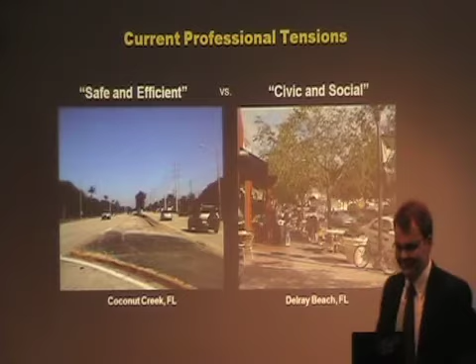So in outlining what we're going to cover today, I want to talk about how we got where we are. If you dig through the historic literature, it's really rather interesting because it was not at all clear that the disconnected suburban subdivision arterial network was the kind of network we would have. It was adopted for the best of reasons, and we sometimes forget why we developed it. We accept it as a given, but going back to the original reason why we designed this is useful for understanding how to move forward. And then I want to talk about the two issues that are often a problem when you start talking about alternative street designs, and that's mobility and safety. And I want to conclude by talking about the trends, both nationally and in Texas, that are encouraging us to take a more form-based approach to design, moving beyond traditional functional classification.

Now, to understand why we have what we have, we've got to go back to the grid at the beginning of the 20th century. Urbanists love the grid, right? We romanticize this as the street network that we seek to embody for its ability to address pedestrians and the like. But at the turn of the century, 1910s, 1920s, it was a problem because the grid was never designed to address automobile traffic. It was designed to maximize the number of corner lots we have in our streets.

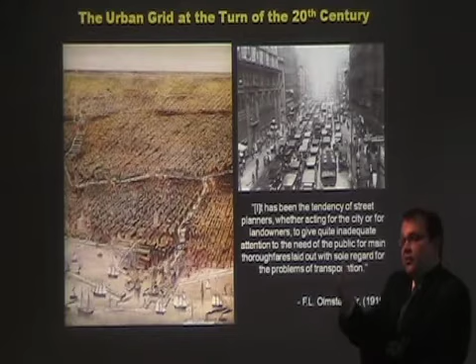Corner lots were the ones that commanded the most developmental profit because they got the most traffic. So if you wanted to maximize the number of corner lots you had, you simply carried out the grid. It also allowed us to move from planning to platting. Cities like Chicago, like New York, if they wanted to grow, just expanded the grid ad infinitum.

Now, when you're dealing with purely non-motorized forms of travel, this isn't a problem. But it became problematic when we introduced the automobile, because just as these streets were good for carrying pedestrian traffic, they proved pretty nice for automobile traffic too. So when streets got clogged like this one in Chicago, traffic would filter onto the adjacent streets in the street network. So what you wind up getting is automobile traffic entering and diffusing throughout the street network, creating problems for residents there.

This is Frederick Law Olmsted Jr. At the turn of the century, 1916 actually, trying to address this problem. And what he said is it's been the tendency of street planners, whether acting for the city or for landowners, to give inadequate attention to the need of the public for main thoroughfares laid out with sole regard to the problems of transportation. What he's complaining about is the grid. The grid is not designed to address modern transportation needs.

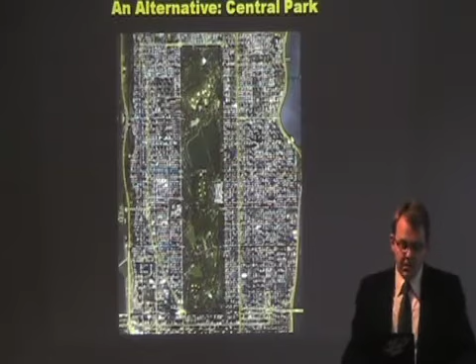Now, it turns out he had an alternative that he thought might work, and that was the alternative proposed by his father in the design of Central Park. Now, those of you who have been there know the way, well, let's take a step back. One of the major design problems that Olmsted Sr. had when designing Central Park was how to deal with cross-traffic from one side of Manhattan to the other.

When you're dealing with a park of this magnitude, there's going to be a lot of cross-park traffic. And the concern he had was how do we design this park so that traffic doesn't undermine the recreational and pastoral purposes of the park itself. A lot of high-speed cross-park traffic would prove problematic for giving folks the recreational pastoral character of the park.

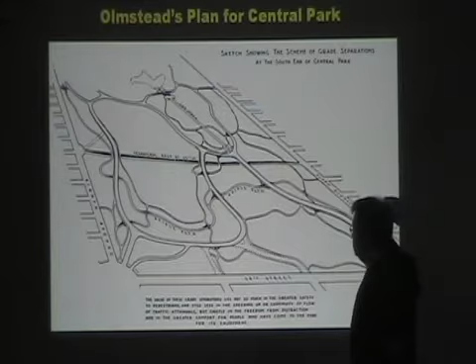So the solution he came up with was transverse roadways. He grade separated the thoroughfares that cross the park. So while the surface of the park has a winding street network, a very rural rustic street network, and pedestrian only, the cross-street traffic was put beneath grade, separated out from the surface of the park so that people using the park wouldn't see it. It also allowed this traffic to move across the park relatively quickly without being impeded by traffic on the surface.

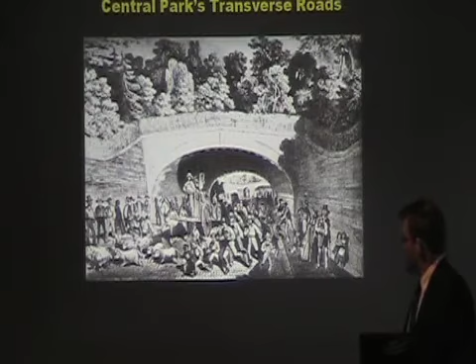This is what it carries today, a different form of riffraff. In this case, it's automobiles. But the idea is clear. We can provide different types of thoroughfares. One type is a recreational type of thoroughfare intended for lower speed pedestrian traffic, and another type is designed to accommodate automobile traffic and the like.

This was carried forward in the first city planning manual, City Planning, 1916: there needs to be a pronounced differentiation between main thoroughfares intended for traffic carriers and secondary or intermediate ones intended for local development.

We need to start designing streets according to their intended function. We all know this today. This is where the idea of functionally designated streets comes from.

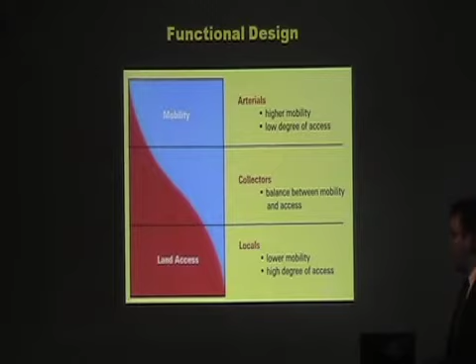The functional classification system that we like to rail on engineers for using was actually designed by planners. It says we're going to design roadways purely on their traffic function, with high-speed arterial thoroughfares carrying high-speed traffic, and local streets carrying access-related traffic with little throughput. This came directly from Central Park, from Olmsted Jr., into early city planning manuals, and was embraced by the engineers subsequently.

It wasn't enough for planners to begin functionally designing streets for their traffic function. We also started rearranging land uses too, and we often go to Perry's neighborhood unit as a model to emulate today.

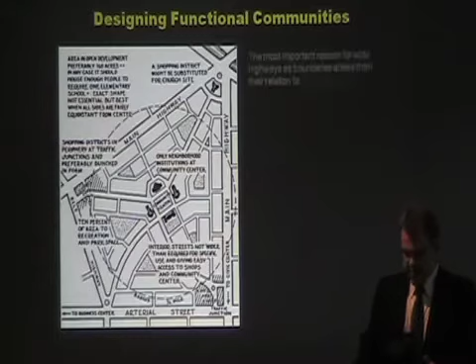But I think we often forget one of the major innovations Perry was promoting here. This was intended to address traffic safety. We still have arterial thoroughfares, but they've been pushed out to the boundaries of the community.

What he wanted to do was, with adequate express channels on the circumference of the unit, through traffic would have no excuse for invading its territory, and its own internal streets could be fairly and deliberately made inconvenient and forbidding to vehicles having no destination within the neighborhood. In other words, by bounding the community with arterial thoroughfares, we can keep this traffic out of the community itself.

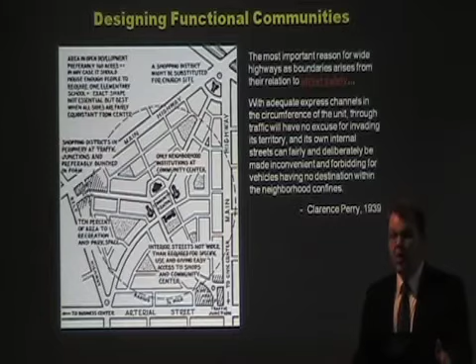But that's not all that was going on. It also entails a rearrangement of the land uses in a community too. Community-serving uses, churches and schools, can be kept at the heart of the community. The problem is the retail. What do we do with that?

If we include retail in the heart of our community, we're going to encourage traffic to enter it. What he proposed was pushing this out onto the junction of the arterials, separating commercial and retail uses from residential uses, pushing them out onto the high-traffic thoroughfares.

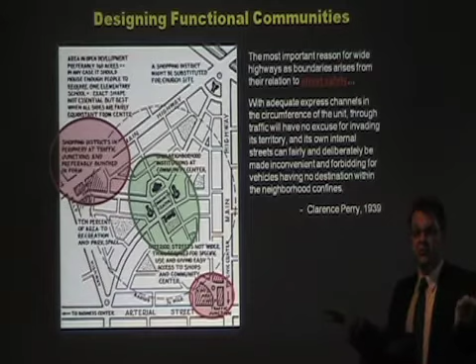And if there's any doubt about the development model that Clarence Perry was putting forward, you can see it here. This is a model he proposed in 1939. It comes from Washington, D.C., but it could be just about any strip development we have today.

Let's push the retail back from the street, provide plenty of parking so that residents coming in and out of the neighborhood can access these on their way to and from work, and so we can capture pass-by trips from the arterial. This is where the modern subdivision, or the modern strip mall, comes from. It's part of the neighborhood unit concept.

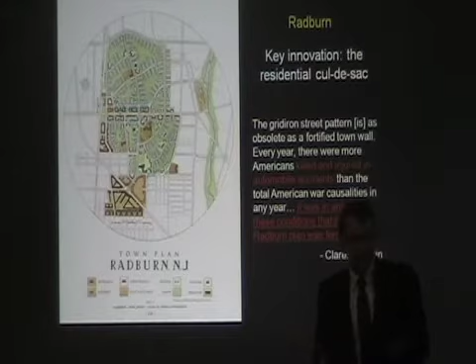It reached its apotheosis in Radburn. Most of us are familiar with this one too. Radburn decided to take this a step further. If Clarence Perry wanted to discourage traffic by providing arterials...

Clarence Stein wanted to solve the problem of traffic on residential streets once and for all by putting in residential cul-de-sacs, so that not only would traffic be discouraged from entering residential streets, but there would be no point for them in doing so. Again, this was a traffic safety solution.

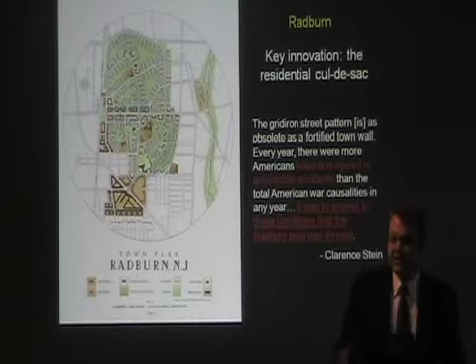The gridiron street pattern is as obsolete as a fortified town wall. Every year there are more Americans killed and injured in automobile accidents than the total American war casualties in any year. It's an answer to these conditions that Radburn was formed. It's a traffic safety solution.

And we've got the same model: residential separated from retail, retail on the major thoroughfares, but now instead of having residential streets that connected, they've been entirely disconnected from the adjacent street network.

So what we've got are three guiding design ideas. One, that we're going to design roadways for specific functions. Two, that we should redesign the residential street network to reduce cut-through traffic. And finally, we should relocate traffic-generating uses to arterial thoroughfares.

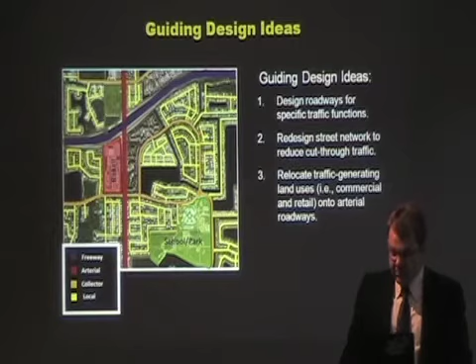But we've done ourselves one better in this too. We wound up transferring responsibility for the arterial thoroughfares away from urban designers, landscape architects, and planners to the engineering profession. And this happened in a sort of happenstance manner.

The problem we had at the turn of the century was the problem of rural traffic. In Texas, you have all these FM roads, farm-to-market roads, and these roads are intended to help farmers carry their goods to market, exactly as the name implies.

But in the 19-teens and 1920s, the problem with these roads is they're dirt roads. And as you see in Texas, these dirt roads, when they get a little water, become impassable. They become worse still when they dry.

Roads were grooved and rutted and impassable. So the concern we had nationally was how are we going to get the farmers out of the mud?

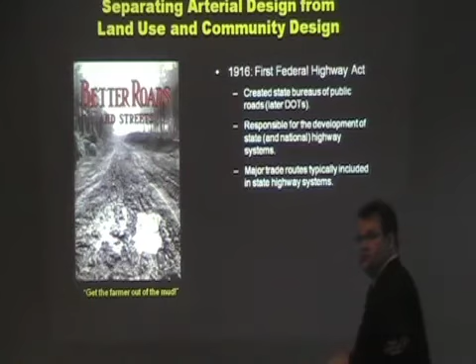In 1916, the same time the city planning guidebook was first published, we also had the first Federal Highway Act, which created bureaus of public roads. They were created for the express purpose of designing farm-to-market roads, paving major regional, state, and national roadways to allow farmers to get their goods to market. They're responsible for the development of state and national highway systems, and their major trade routes throughout a state were included on state highway systems.

It's important to recognize your departments of transportation all started as bureaus of public roads, and many of them still focus on road building as a legacy of this.

That DOTs are focused principally on mobility was ensured when we provided a dedicated revenue stream to support mobility-based efforts. In 1932, we adopted a federal gas tax to support state highway systems. We now have agencies in each state with a mandate to address mobility and a funding source that allows them to continue pursuing that mandate.

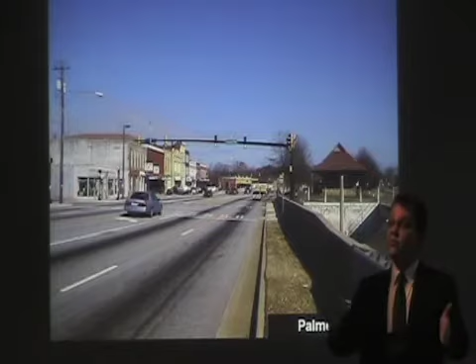Which is why, when you go through our main streets, you see these types of roadways. This is Palmetto, Georgia, could be Fredericksburg, Texas, could be many of our towns. These were the major trade roads that existed at the turn of the century. Development located on these roadways because of the high amount of traffic that occurred there.

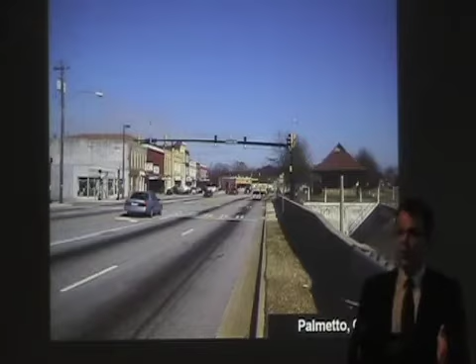But as they were later adopted onto state highway systems, they became designed to state highway system standards. Because the unit of design moved from lower speed pedestrians, draft vehicles, and the like, to automobiles, the design standards of these roadways changed.

A lot of battles you see in Georgia, and I worked in New Jersey where you see a lot of these too, are about how do we take these streets and convert them back to the lower speed uses they used to serve. So that's how we got to where we are today.

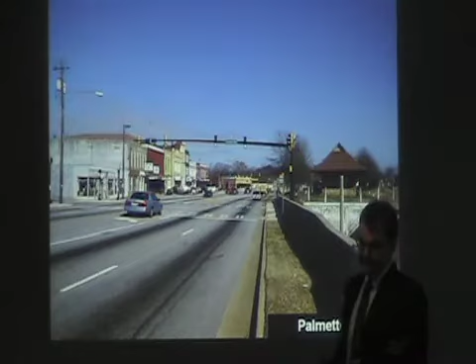The question becomes, how do we get back to where we want? New urbanists want to go back to the original development model, because there's value to be had in the traditional spaces we used to build, and the effort is to go back to designing them.

Well, today, how we approach arterial design and planning is through a model like this. This is Henry County, Georgia, but it could be anywhere in the country, Houston or anywhere else. What we do is develop aggregate models that focus solely on arterial roadways, because these are the roadways we design to carry our traffic.

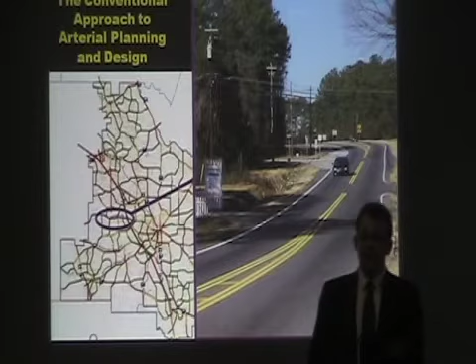We identify in the horizon here where congestion is going to be, in this case a two-lane rural roadway, and then we provide capacity for that horizon. So we add capacity for that horizon. Our planners have come around and zoned it for retail and commercial uses, so the retail and commercial uses follow shortly thereafter, and what we've done is undermined our mobility over time by virtue of the disconnect between the transportation and land use plan.

Now don't blame the engineers for this. We hate these roadways, the strip commercial on the arterials. The engineer never wanted these things to have strip commercial uses. This is a land use problem, and it's a planning problem.

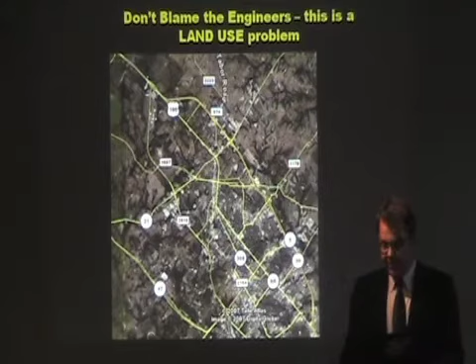This is Bryan, Texas, and here's the zoning ordinance overlaid over that. Planners find these arterial roadways irresistible. They love to take the red crayon and color the lines. I think they're incapable of not doing that. So here, the land use plan for Bryan colors the highways for commercial arterial use, which allows us to create a lot of unnecessary access-related traffic on those roadways.

Perhaps even more irksome, they spent all this money building a bypass route around the city, and then—another thing I don't understand about Texas—these access roads. They don't make any sense. So we build a bypass, then we put access roads on them, and then we put retail on them, and what we have is a really terrible commercial street. Anyway, that's what we have to run with.

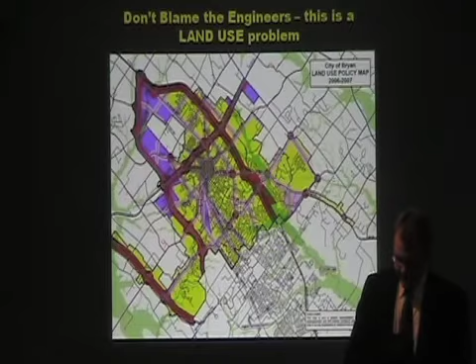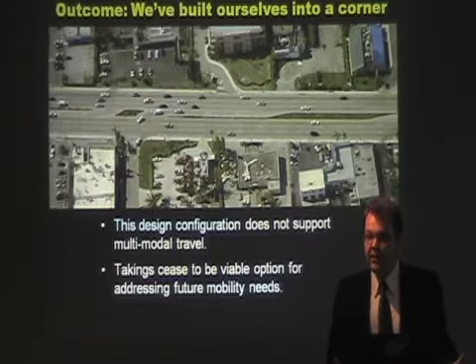It's not a design that accommodates multimodal travel well, but it's expensive to take more right-of-way. At a certain point, it simply becomes too pricey to add capacity. So you wound up building yourselves in a corner.

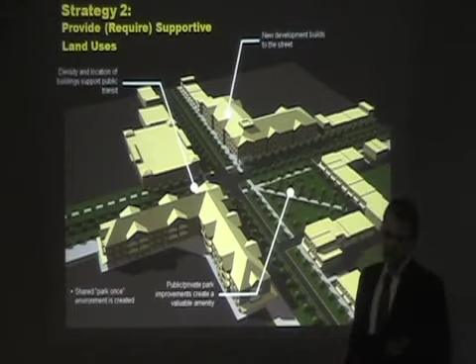Now, a lot of the effort today is focused on how do we make these design conditions more pedestrian-friendly. This is bread and butter new urbanist stuff, right? We add pedestrian-oriented streetscape features, and then we bring the buildings to the street. Now we've got an environment that is a little more conducive to pedestrians, a little easier to access transit on the right-of-way.

But it doesn't solve the vehicular mobility problem. We may have designed a street network that works well for other modes, but we do so by neglecting vehicular mobility as well. A lot of times, and I think it's the wrong way for urbanists to go, we like to fight these pedestrian versus automobile battles. We do it over safety, and we do it over mobility. And if I make one point today, it's that there's a win-win solution.

Hopefully you'll come away from this and realize that we can address the needs of transit, the needs of pedestrians, and the needs of motorists all at the same time if we rethink the nature of the problem.

The nature of your urban traffic problem, your congestion problem, is what's called control delay. It's delay associated with intersections. The more traffic you have at these intersections, particularly these left turn movements, takes time away from through-moving traffic. The more traffic you load on an intersection, the less efficient it becomes. And when you model level of service for urban streets, that's called control delay. That's what drives your level of service in this environment.

We've created a problem where our intersections don't work well by creating a disconnected street network. Our default design, coming straight from the landscape architect and urban design folks, is to design our transportation networks with sparse hierarchy, where we've got an arterial thoroughfare designed to carry all of our traffic. But what we've done is we've designed a network with choke points, right?

We've designed a network where all of our traffic is loading onto a handful of intersections. So we've got to take time away from each of those intersections to allow people to filter into it.

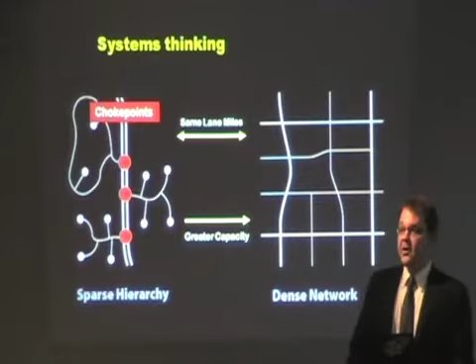Which is why, when you take the same amount of lane miles and you put it in a connected network framework, you wind up getting better performance. Because that traffic's able to diffuse. No individual intersection has to carry the same loads as these. The traffic is dispersed.

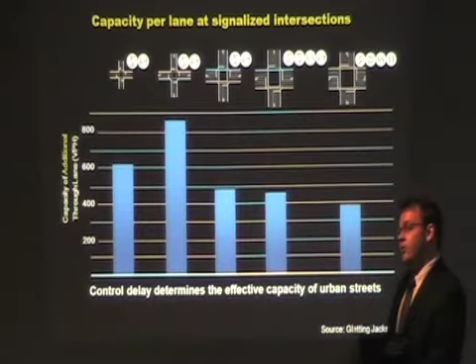And what we see here, and I think in a lot of these slides you're about to see are from Glatting Jackson, who do some great work on this, is that your capacity per lane is optimized in a 3-lane configuration. Right? 2 through lanes, 1 in each direction, and then 1 left turn lane to get that left turn traffic out of the through lanes.

Adding lanes beyond the 3-lane configuration doesn't get you the same bang for your buck. You're better to have a network of 3-lane roads than multi-lane roads throughout that transportation network. Because as you start adding the extra lanes, you wind up carrying the extra traffic and you wind up having to allocate the extra time to those intersections, especially for your left turns.

So if we move away from this arterial thinking and we start thinking in terms of networks, what are the kind of things we can do? In the case of Chattanooga, this runs along the waterfront and connects up to their aquarium.

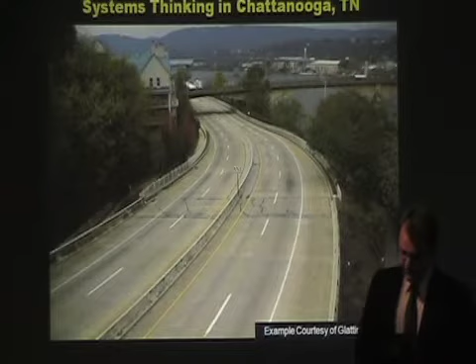What do we see? Well, the problem they have with this roadway is that choke points were backing up along it. Where the roadway enters the grid, the first intersection fails, then the next intersection fails, and it bleeds on down the roadway. So how do you solve a problem like this?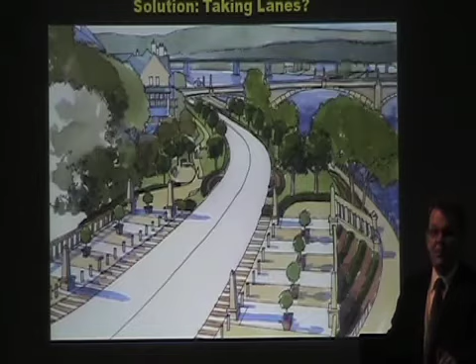Do you add lanes? Well, what they said was, we could solve this problem by taking lanes. And you might say, well, how can that be? We have a capacity problem. Well, the problem is a problem of sparse hierarchy.

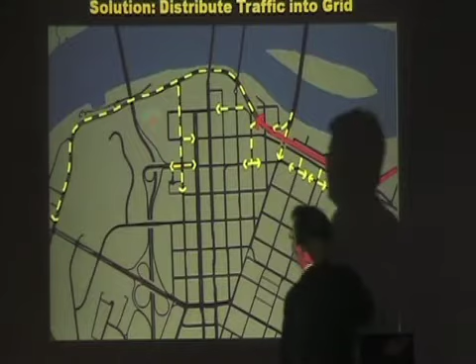Right now you've got 1,758 vehicles per hour peak. At this point, 2,050 vehicles per hour peak up at the top, filtering down to the network. But if you start punching holes in that network, this traffic can diffuse. Rather than forcing it to load all into this section of roadway, it can diffuse down through the network. After completing this, your road traffic volumes are cut down by more than half, which allows you to pull capacity out of that roadway.

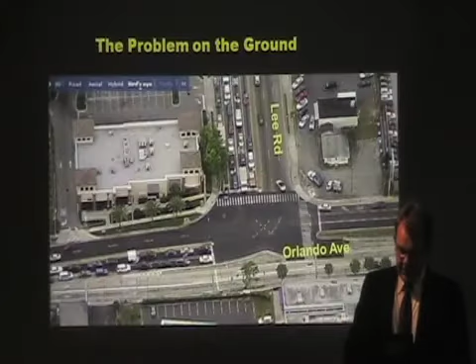Another example, this is Winter Park, Florida. The problem here is you've got two arterial thoroughfares, one of which jogs around a super block. You can see the problem on the ground: you've got all of this traffic trying to load into this intersection, particularly with the left turn movements, and at peak hour it backs up.

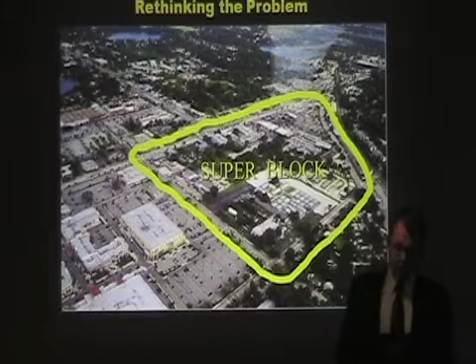The problem, however, is in part a land use problem. How to solve it? Well, first is to recognize that the problem is created by the presence of a super block, where traffic has been forced to channel around it. But if you punch holes in the super block and allow traffic to sift through, you can relieve traffic. So the plan for this intersection was to punch the network through, allowing traffic, rather than jogging through two left turns, to go straight through.

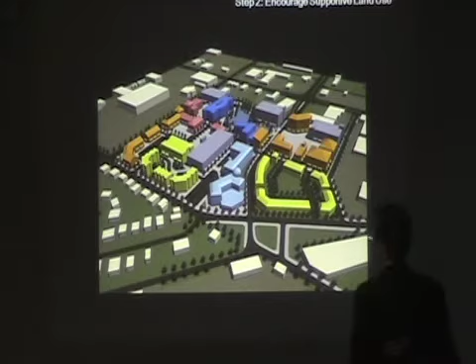And while you're at it, redesign the land use in a more multimodal configuration. Models for it took it from level of service F to level of service E, or D. Not a great improvement, but an improvement nonetheless, and one that can actually be shifted onto the private sector—you simply include this in your land use codes. Well, in places other than Houston, right? Places that do have land use codes. I guess you have deed restrictions instead.

So rethinking the problem, you've now got a neighborhood that is multimodal, walkable, pedestrian friendly, and one that moves traffic better too. It's a win-win solution.

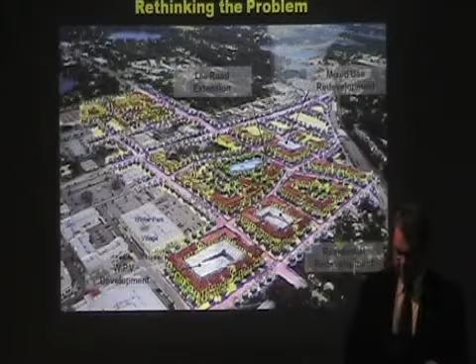The big point I want to make is that a lot of our urban mobility problems are as much urban design and operations problems as they are capacity problems. We've historically been too quick to say we need to add capacity to the intersection, and not really thought from a systems perspective on how we can address this through means other than capacity. We're going to have to start doing this, and you're going to see more and more of it—I'll tell you why at the end of the lecture.

But the point I want to make is we need to start thinking in terms of systems and networks. Because if we start thinking in terms of systems and networks, we can come up with win-win solutions that get us roadways that move traffic and that get us roadways that address multimodalism.

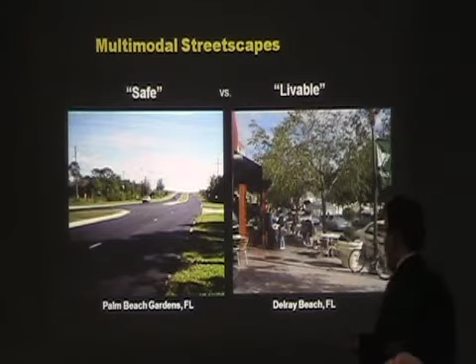The second issue, and this is one where most of my research focuses, is the issue of safety. If you want to get an engineer really worked up, you tell them this is safe—this violates everything we learn in engineering school. We have made a roadway that is hostile to drivers. If drivers err during the course of traveling, we've got trees for them to run into. They crash and they'll get injured and killed. Deadly. Dangerous.

So we tend to prefer roadways that are what we call forgiving, where lanes are wider so that if drivers deviate a little bit from their intended path, they can correct. These roadside hazards are eliminated from the right-of-way so that if they depart from the travel way, there's nothing for them to strike and get injured.

It was originally believed that speed was the problem, and that if we're going to make our children safe, we need to reduce speeds. And it's not just urban design folks that said that—the first edition of the Green Book, which came out in 1940, expressly cautioned us that wider lanes and shoulders may invite higher speeds, and that higher speeds are a safety problem.

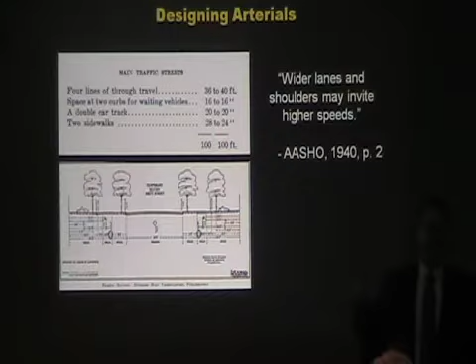This radically changed with the publication of Unsafe at Any Speed in the 1960s. What this book said, we know it because it resulted in the recall of the Corvair, but it was making a broader philosophical argument that engineers embrace.

What it was saying was, we've got an epidemic on our highways. We have focused on addressing driver behavior as the means for addressing safety, so encouraging drivers to go slower. But these drivers are stupid, right? We see this all the time. They talk on their cell phones, they behave foolishly. We need to just begin assuming that drivers are going to make mistakes when they drive. We ought to assume that drivers are going to depart the travel way, run off the roadway, and crash into objects.

In other words, we ought to treat it the same way we address epidemiology. I need to start addressing the environmental sources of hazards and injuries. Stop trying to get the driver to change their behavior and start designing the roadway to avoid the injuries. So let's eliminate the environmental sources of injuries and fatalities.

The publication of this led to a series of AASHTO Senate safety hearings. They were actually called AASHO in '66. They became transportation officials in the '70s, but state highway officials in '66 held a series of safety hearings to figure out how we can deal with this epidemic on the highways.

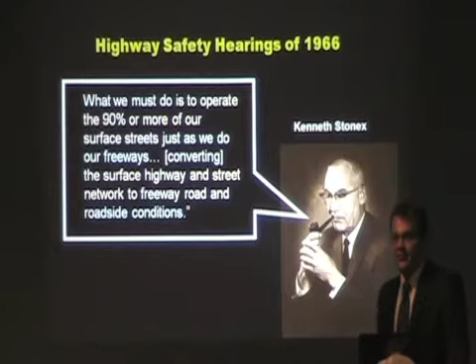He said, hey, we've got to design and operate 90% or more of our surface streets just as we do our freeways, converting the surface, highway, and street network to freeway road and roadside conditions. Now, if you get a Lifetime Achievement Award from the Transportation Research Board for doing safety, it's named after this guy. So those of us who are the best at doing safety improvements will end our careers receiving the Kenneth A. Stonex Award.

He was profoundly influential in the way the transportation engineering profession does safety. We see this in the manuals: highways built with high design standards put the traveler in an environment that's fundamentally safer because it's more likely to compensate for the driving errors he will eventually make. Drivers are going to be fools, so let's make the roadway forgiving.

More modern editions have the same idea: every effort should be made to use as high a design speed as practical to attain a desired degree of safety. High design speeds translate to the use of wider features for lane shoulders and clear zones. The higher the design speed, the wider the geometric features of a roadway.

So what we've got is a design philosophy based on three ideas. One, most of us will agree with this. Even driving around here, I had time to cruise around before the meeting today, and you see people on the phone, cutting in lanes. Drivers are going to err, they're going to make mistakes, and behave in ways that result in crashes and injuries. The second premise is that driver errors are random and unpreventable, that you can't stop drivers from making mistakes. Thus the third premise is that the best strategy for addressing driver errors is to ensure that all roadways are forgiving to them when they inevitably occur.

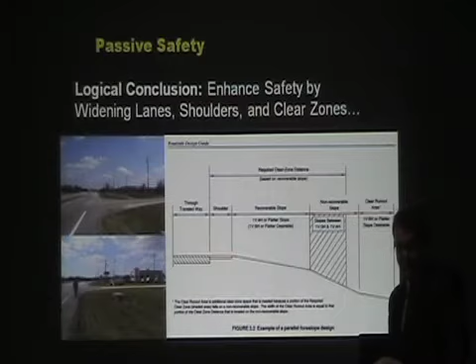So the logical conclusion is the one that I was trained in: we enhance safety by widening lanes, shoulders, and clear zones.

Now the presumption again is that run-off-roadway events, which cause us to design our roadsides for automobiles, are random and unpreventable. And if this is true, you would expect this encroachment event to be constant. This is what we use in things like the roadside program to estimate the likelihood of crashes that occur.

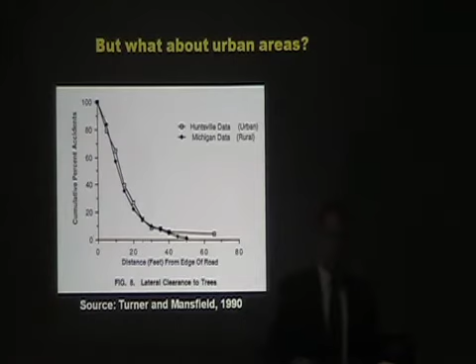But the question then is, what about urban areas? The data used to support the application of clear zones in urban areas compares Huntsville, Alabama—not exactly a pinnacle of urbanism—to a rural environment. In both cases, the majority of crashes, roughly 80-90%, occur within 30 feet of the right-of-way. So the conclusion they derive is that if we eliminated all trees within 30 feet of the right-of-way, we could also eliminate the majority of roadside crashes.

So I decided in my dissertation work to reinvestigate this. Because again, I'm an English major—what do I know, right? It didn't make sense to me. It's in a manual, but I don't see it when you go to these streets. So I figured I'd go out to urban areas, do some field measurements, and figure out what's really going on.

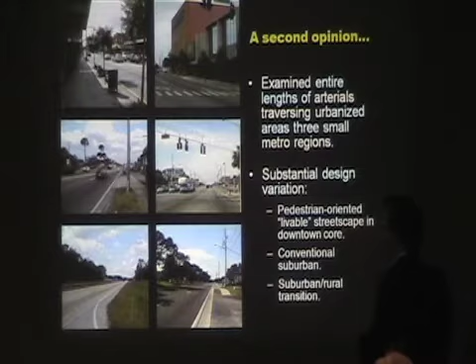I took streets—these are actually in Central Florida, DeLand and Ocala were the communities I looked at. I looked at arterial roadways that traveled the entire length of the metropolitan area. I went out and field measured all the geometric features, and all of them had traditional urban environments along the core. I measured the distance between roadside fixed objects and clear zones, and found about the same thing: more than 80% of these crashes occurred within 20 feet of the right-of-way.

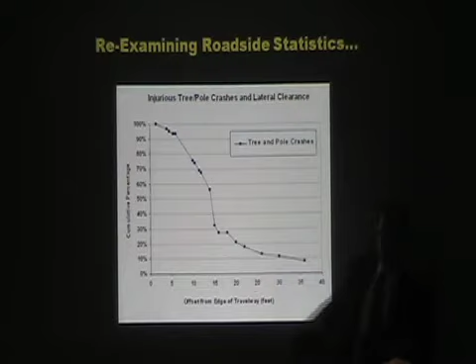Does that mean the original study's conclusion was right, that we should eliminate all these trees adjacent to the right-of-way? Well, no, that struck me as kind of foolish, because most of these streets didn't have 20-foot clear zones. So I also plotted out the percentage of streets with clear zones of different widths.

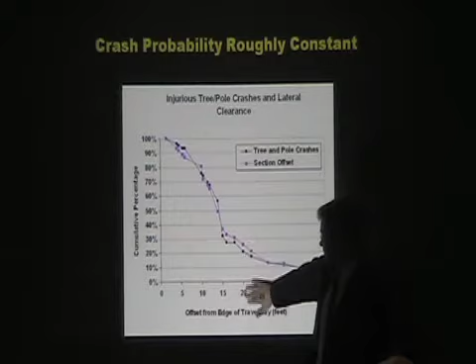And what we see here is that the probability that somebody's going to crash into a tree with a given clear zone width is constant no matter what the width is. You're just as likely to crash into a tree with a 20-foot offset as with a 5-foot offset—the probability is fixed. Stated another way, the low incidence of crashes on streets with wide clear zones is solely a function of the fact that there aren't very many streets with wide clear zones.

All right, now we've got other tricks in our sleeve in engineering school. We like to use statistical modeling.

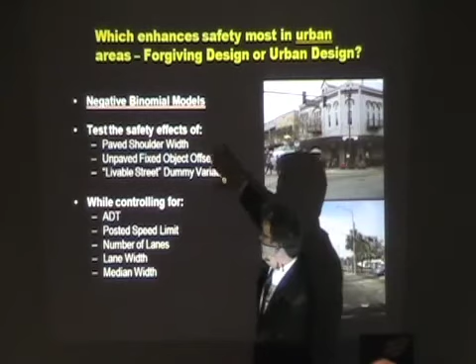I'll try not to make this too boring, but I wanted to see how different roadside safety features affected crash incidents. I controlled for the things you normally want to control for: traffic volume, speed limits, number of lanes, lane widths, median widths, all this stuff that can affect safety. But I also modeled paved shoulder width, unpaved fixed object offset—the setback of the tree from the edge of the paved portion—and then a dummy variable for whether or not a livable street treatment was present, so streetscape features, sidewalks, and the like.

Now if we're going to make a claim that a roadway is safe, that a roadside feature is safe, we've got to make a couple of statements. First, it's got to have fewer roadside crashes. But these roadside crashes shouldn't be replaced by increases in other crash types. So if you eliminate 3 tree crashes but you add 20 multiple vehicle crashes, it's hard to assert that the roadway is safer. We do that, but we shouldn't.

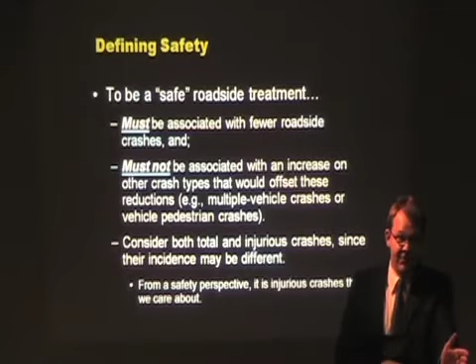I modeled both. I was only able to model—well, we'll get into this in a second. I wasn't able to model fatal because our livable streets didn't have any fatalities, but I stole a punchline for later. That's okay.

So the model results: shoulders, and we engineers like shoulders, these nonetheless were consistently associated with increases in crashes, whether they were roadside crashes or mid-block crashes. Now they didn't reach statistically significant levels, but nonetheless the association was positive. It certainly wasn't this negative and significant effect that you would expect if passive safety theory was true. It was the exact opposite relationship.

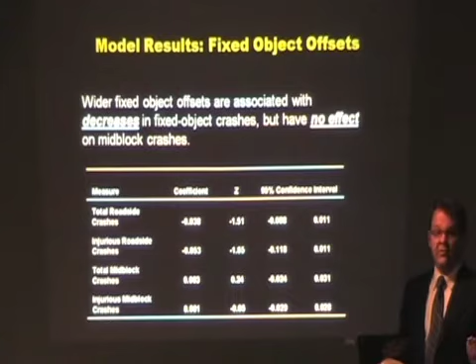Wider fixed object offsets were associated with decreases in fixed object crashes, but actually resulted in no net effect on mid-block crashes. Stated another way, there may have been fewer tree-related crashes or pole-related crashes, but that was offset by an increase in multiple vehicle crashes. Stated another way, there was no net safety gain as a result of providing clear zones.

The only feature that was consistently associated with a significant reduction in both roadside and mid-block crashes were these livable street treatments. Across the board: fewer total crashes, fewer roadside crashes, fewer injurious crashes, fewer mid-block crashes, fewer injurious mid-block crashes. No matter how you measure safety, they're safer. The only roadside treatment consistently shown to do so.

And you might ask, well, how much safer? I'll tell you: per vehicle mile traveled, there were 40% fewer mid-block crashes, 67% fewer roadside crashes. So even though you've got not one but two rows of deadly trees, nobody's crashing into them.

Further, not a single injurious fixed object crash occurred in the livable sections during the 5-year period, nor was there a single fatality involving either a pedestrian or a motorist. And again, if we measure safety in terms of the incidence of crashes, injuries, and deaths, and not in terms of our ability to meet a theoretical design condition, we must then agree that the roadway with fewer crashes is the safer roadway, regardless of the theory you use. Some of us like evidence and not theory. Theory should support evidence, and not the other way around.

All right, so what's going on here? The passive safety theory ain't working. Pushing this stuff back isn't making it safer. Well, it's kind of fun.

You go out and do field measurements, and you feel like you're CSI. You've got the crash reports and you're trying to reconstruct what happened. I got to do this for a couple weeks out in the field, and it's like here, actually—South Central Florida is a lot like this place in February, March. It's pleasant, well, except for this last February where it was freezing, like Seattle here. But generally the weather's pretty pleasant, so it was a nice time.

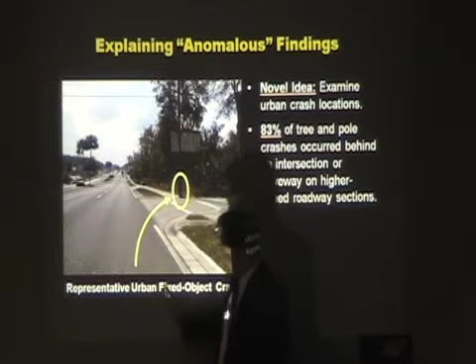If you decelerate, the people behind you come up on you. How dare you? So you wind up attempting to negotiate these turns at speeds that don't allow you to safely negotiate them. So what do you wind up doing? You wind up encroaching on the back end of a driveway or curb. So you wind up hitting this object, right?

And it doesn't matter whether it's located here or 30 feet back. What matters is your trajectory on that turn. The probability of striking it anywhere in this zone is exactly the same.

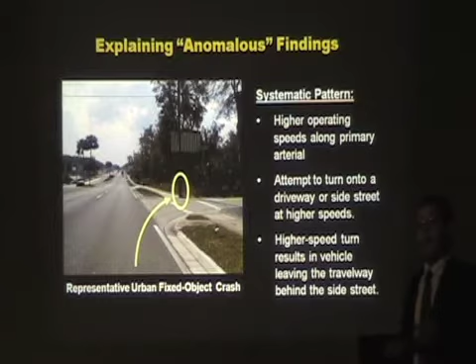The design condition is different, right? The systematic pattern here. This isn't random at all. This is systematic. It's embedded in the design of the roadway. Higher operating speeds on the arterial, an attempt to turn onto a driveway or side street, which results in encroachment at the back end of the driveway or curb.

Which means we need to distinguish between two types of errors. Nobody can disagree that drivers behave like fools. They do. We can see it, and I'm sure we'll see it tonight. Some of us may even be those fools, right? Humans will err, and roadways should be forgiving when they do. That's the theory we have. It encourages us to strive for a single fail-safe solution.

However, there's another perspective, and that's the systematic error perspective, one that we don't design for. And that says that the errors that lead to crashes are the result of the design itself. That we can design environments that make crashes more likely to occur, that encourage people to create errors.

Stated another way, a lot of our designs are like putting a bullet in the chamber of a gun and then handing it to someone. All the conditions are set. All that's needed is for somebody to pull the trigger. Everything is set up. When you have the high-speed arterial with the driveways and side streets, you've loaded the gun and put the bullet in the chamber.

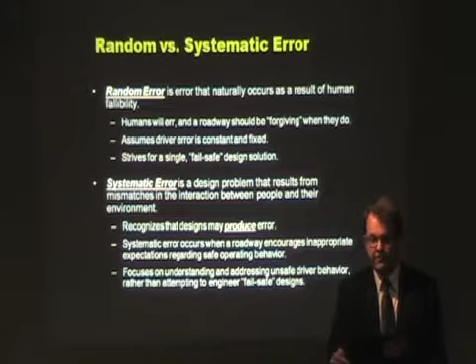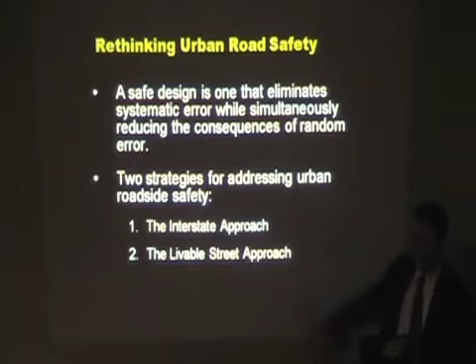All right, which suggests we need to rethink urban roadside safety, or urban road safety. A safe design is one that eliminates systematic error while also reducing the consequences of random error. Now, this is a tough bar to meet, but I would assert to you that it can be done. And there are a couple ways to do this. One is the way we do on our interstates, and I'll explain what that is. And then the second, the one that we as engineers need to start adding to our design palette, is the livable street approach. And no matter how you slice it, interstates, for the most part, are safe roadways.

And they're safe, both for the reason we assume, they're forgiving by design. They've got wide lanes and wide shoulders that are forgiving to errors when they occur. But what we've overlooked is that they also address the problems of systematic error too. A lot of the problems we have on urban streets is that you've got people jockeying in and out of driveways. That's eliminated on these roadways by limited access. Those turning maneuvers that cause people to run off the roadway are addressed here through the use of on-ramps and deceleration lanes.

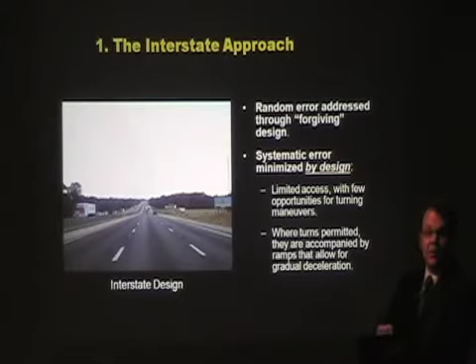Right? We're able to gradually decelerate down a curve. We may also have a yellow sign that tells us what speed we got to do that at. It becomes more transparent what the behavior is. Access management - you don't see a lot of this in Texas, but you have a lot of it in Florida, where you try to control the access on a roadway with medians, deceleration lanes, and the like. These things are safe. They're great.

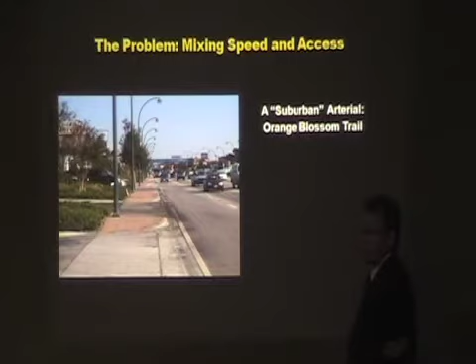They're a suburban road treatment, but they're good from a safety perspective. They separate out access from the roadway. They provide deceleration lanes that allow people to decelerate rather than traveling through the through lane. And so they have the same design conditions: higher speeds, few driveways and side streets, and deceleration lanes. Our problem is this type of roadway, the suburban arterial, where we don't limit access. And this is actually our default design condition. These are actually okay, because traffic's so bad, you go kind of slow out there. That's going about 20, 25, which isn't bad for an urban street.

But if you look at the crash record on streets like this, they're through the roof. Compared to the livable streets we saw, this street has 4 times the roadside crashes, despite the fact that objects are pushed back 5, 6 feet, right?

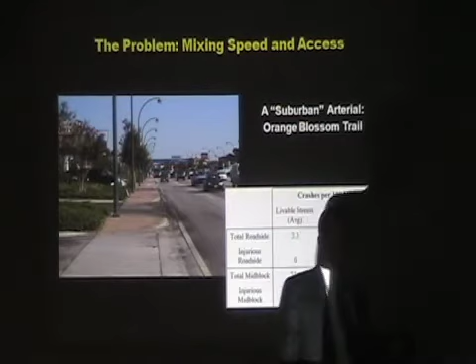They've also got 4 times the mid-block, injurious mid-block crashes, multiple vehicle crashes as well. And when you look at the distribution of crash types, 65% of them are attributed to the intermingling of access and speed. We've tried to have a high-speed roadway and an access roadway at the same time. As soon as you do that, you've created a condition that's a recipe for disaster. Because high-speed traffic traveling through an arterial thoroughfare has a more difficult time braking for vehicles turning in and out of driveways or pedestrians crossing the street. They become less able to do that. You create an unsafe condition as a result.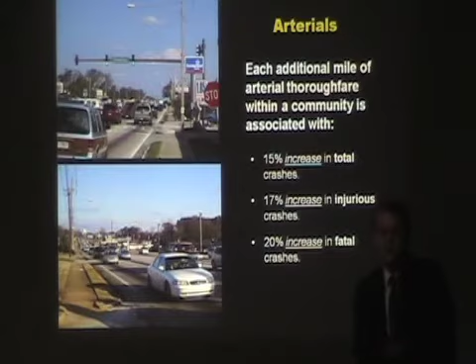Now, as part of the study that won the award from APA, I actually went out with San Antonio and figured out how much more dangerous these things are. Each additional mile of arterial thoroughfare in your community results in a 15% increase in total crashes, 17% increase in injuries, and a 20% increase in fatal crashes. Want to make your roadway more dangerous? Add more arterials. Problem solved.

Strip commercial uses - and this is after controlling for traffic volumes - each additional strip commercial use is associated with a 1.3% increase in total crashes and a 1.1% increase in injuries. And they're agglomerative. You want to drive up your accident tally.

And frankly, on one hand, I kind of like it because it provides work for me, right? Yeah, I guess that joke wasn't fun. All right, I like data, right? So I get to see, I don't have to see it, I get to look at the data.

Anyway, you add these, and this is the percent increase that occurs with each additional strip commercial use added to a roadway. Big box stores, same thing, same effect, but because they're bigger, the effect is even bigger. 6.6% increase in total crashes and a 4% increase in injury crashes.

However, the other issue with big box stores is that there's a lot of off-network traffic too, because you've got to provide circulation lanes for all that traffic that's pulling in and parking. We don't look at that in safety analyses, we just look at the public right-of-way. I wanted to figure out how much of these crashes were occurring off-network in things like driveways and circulation lanes for San Antonio.

In the case of San Antonio, 13% of all the crashes that were occurring occurred off-network. More than 1 out of 10. We don't even count them, we don't analyze them. 9% of the injuries, 16% of the fatalities. Pretty amazing, huh? And a lot of them are people running over their kids in driveways. So that's one source of them. But that's where the fatalities are occurring off-network.

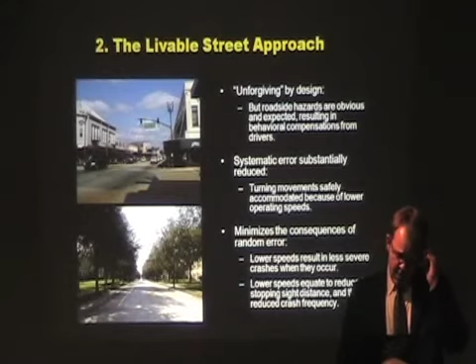An alternative approach is the one we need to add to our palette, which is the livable street approach. Now, these roadways are unforgiving by design. You leave the travelway on one of these roadways, and you'll strike something that will hurt you. However, the hazard is obvious. Most people don't get in their cars and want to die.

On any given year, there's about 50 traffic-related fatalities where people go out, walk into a street, or jump off a bridge and kill themselves. Right? 50. There's roughly 40,000 people that die each year, which suggests to you that 39,950 people got killed that didn't want to die.

And people are pretty amazing. They say, if I run into one of these trees, I'm going to get hurt, so I'm going to try not to run into the tree. On the case of this roadway, it's a 45-mile-per-hour approach. I measured the speed through this section. The speed dropped down to about an average of 28 miles an hour. Perfect. People saw this roadway, and it's a 14-foot lane. You can tear it up through there if you want to. But the environment tells you not to. So you don't. People go at lower speeds.

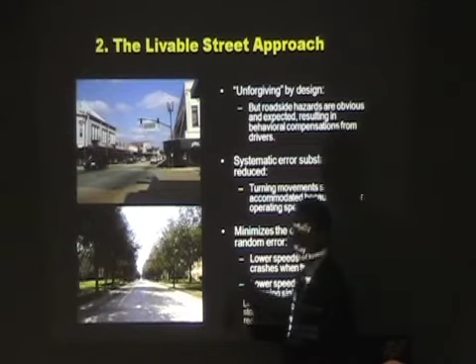Now, these are unforgiving by design, but the hazards here are obvious and expected. And people engage in behavioral compensations to minimize their exposure to hazard and injury. So it reduces systematic error, because turning movements that can cause tree-related crashes are accommodated by the lower speed. It also reduces the likelihood of crashing into another vehicle or a pedestrian, because at lower speeds you can brake more quickly, you're better able to respond. Moreover, as we're seeing in the environmental psychology literature, people are more attentive in environments that have rich roadside environments.

The environment tells drivers to look out for pedestrians and other cars, and people respond by doing that. So it addresses the systematic error, but what about the random error? What about drivers that make mistakes?

Well, we need to go back to the basic physics we learned. What causes injury and death is the amount of force absorbed in an impact, and that force is a function of the speed of the vehicle at impact. So if you reduce speed, you reduce the force absorbed in the impact, making a roadway that's inherently more forgiving, because the force absorbed in that impact event is less. It's forgiving by design because of the lower speed.

So the argument I'd make is that through good urban design, by paying attention to urban areas and their characteristics, we can get mobility and safety. We can do a better job than we traditionally have done. But you're not going to do it for that reason. Texas is going to have to do it, nationally we're going to have to do it. But we're not going to do it because it works better, because it's more sustainable, or because it's the right thing. We're going to do it because we're broke.

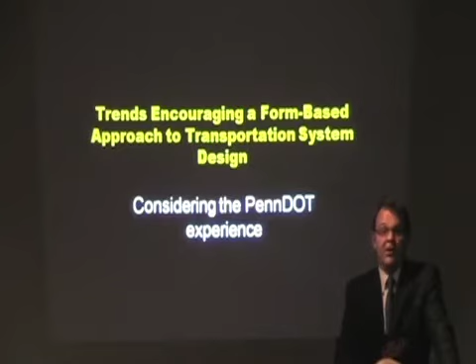You can see this in Pennsylvania. They've got the same problem everybody else does - vehicle hours of delay is going up, vehicle hours traveled is going up, VMT is going up. However, unlike places like Houston, their population really isn't growing. So they're getting all the problems that growing places have, without the population growth.

They've also got the problem you've heard TxDOT complaining about - we don't have enough money. The gas tax is broken, we can't afford to do our projects anymore. In this case, Pennsylvania actually had a gap between the amount needed simply to maintain highways and bridges and the amount available, which caused them to sit back and reassess what they were doing.

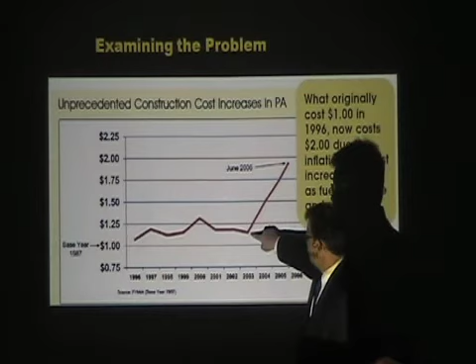What was the cause of the problem? Part of it was that material costs have started going through the roof. It's markedly more expensive to build something now than it was just 5 or 6 years ago. Costs have doubled and tripled for things like concrete, steel, and asphalt.

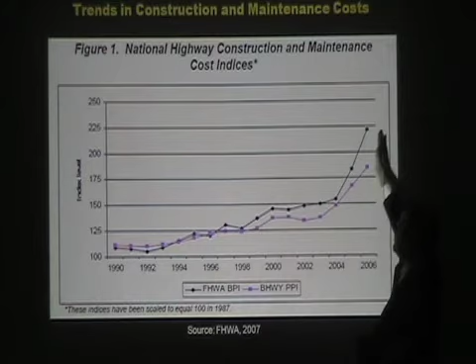And it's not just Pennsylvania - it's not that these things are more expensive there specifically, they're more expensive nationally. We see the same national trends. All of these materials are a lot more expensive to buy today than they were a few years ago, and the reason is there's increased competition for them.

China is in the process of building its own interstate highway system - roughly 85,000 kilometers, 60,000 miles of highway, equivalent to the U.S. interstate system. They're committed to doing this, and they need it as part of their industrialization. That means greater competition for transportation-related materials, and when materials become more scarce, price goes up. This is going to be going on for another 20 years. Regardless of whether we fix the gas tax or not, material costs still cost 2 to 3 times more than they did just a few years ago.

The problem's even bigger - India wants to be a first world country too, and they know that to do that they need to start providing an interstate highway system of their own. Right now India is connected largely by 2-lane rural roadways, and they need to add capacity. The problem is further compounded by Tata Motors creating a $2,500 car, meaning the roughly 300 million people in India's middle class can now afford an automobile. These folks were getting by on bikes, two-wheelers, mopeds and the like. Now there's increased automobile usage, and there's going to need to be infrastructure to accommodate it, meaning more competition for the same materials that are causing costs to go up.

You'd expect costs to keep going up as India begins mobilizing its highway system as well. Now, there are a couple things you can do. I came from Georgia Tech prior to here, and one of the things you can do is the ostrich approach - where you put your head in the sand and pretend you can get around the problem through innovative finance. So Georgia, in its infinite wisdom, decided to do a bunch of grant anticipation revenue bond funding.

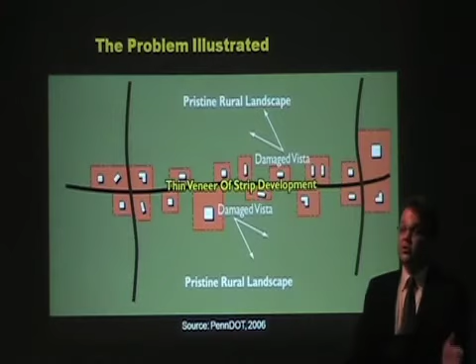Well, they looked at the nature of what's going on. We don't have a lot of growth in Pennsylvania, but we've got a lot of sprawl. Our metro areas are sprawling, and they're doing it in part because our transportation system incentivizes it. We provide highways, and we get a thin veneer of strip development along the corridor.

What they said was, we need to begin discouraging this development from happening. We need to begin having this development occur in compact centers at major transportation nodes, preserving the integrity and mobility use of that corridor itself. In other words, what they're doing is making their transportation problem a land use problem.

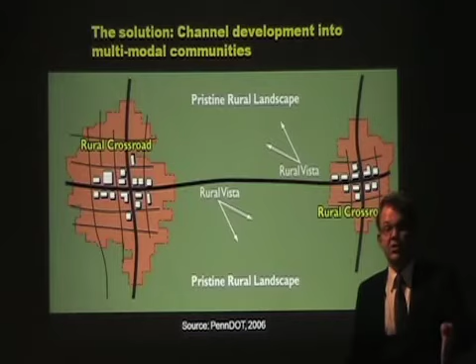We'll skip that for time. The key ideas here: one, we have to focus on safety, and efficient doesn't mean safe. Right now we play this game that we can have a safe and efficient roadway, and in urban areas that's not necessarily true.

And that we can address mobility through land use and urban design. That we ought to be designing environments that maximize mobility, not by enhancing throughput, but by reducing travel demand overall. And then we need to prioritize operations and maintenance.

They've come out with a sound land use implementation plan that they're using in evaluating projects, and they've actually transect coded their metropolitan areas. In this case, this is Philadelphia, which crosses two states. They have transect coded it—the DOT, right? The Department of Transportation—because to get the transportation solutions they need, they have to pay attention to the environment in which they're being placed.

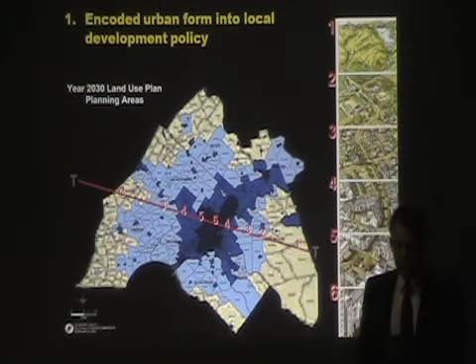And what are they using? Well, they're trying to link roadway design to urban form. And we have a new manual that lets us do that, although most of us have been aware of this thing for the last 5 years, right?

It's been floating around since 2006, recently passed. Used to have a much more unwieldy name. But 'Designing Walkable Urban Thoroughfares' is a context-sensitive approach, which gives us design specifications for mobility-oriented streets that work in an urban environment—your urban avenue and your commercial street.

And you might say, well, fine, Dumbaugh, that ain't the way we do things here in Texas, right? And I saw, about a year or two ago, a design for Kirby and Westheimer, right? And I was impressed with this because it seemed like a Texas solution, right? If you want to make anything better in Texas, put a star in it, right?

Well, I'd suggest to you that business is changing in Texas. Back in 2007, the Texas Transportation Commission authorized the Texas Urban Thoroughfares Committee. Some of you may know about this. It was pushed forward by Mike Krusee, Scott Polikov, who's based out of Dallas but is all over the state—really pushed this thing forward. I served on it. We were tasked with coming up with alternative ways for TxDOT to engage in business practices.

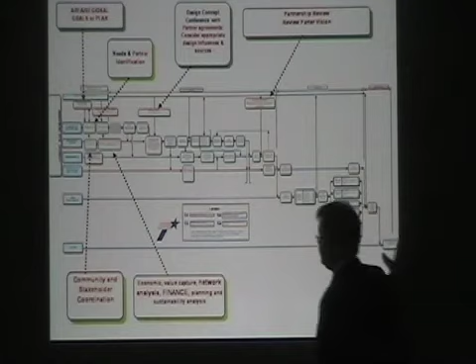And what came out of that were a couple things, and I won't go through all of it. But what came out of it was we need to have more attention to our stakeholders as part of the planning process, and we need to start including local land use plans when we engage in design. So we ought to bring our stakeholders, both community stakeholders and local planning documents, into the very beginning of the planning and design process. In other words, we need to be more context sensitive about the way we do this, and we need to start thinking beyond simple mobility needs.

But this is really exciting too, and I would argue that Texas is one of the leaders in the country because of this. They also actually adopted this manual back last June, right back when it was just an ITE recommended practice.

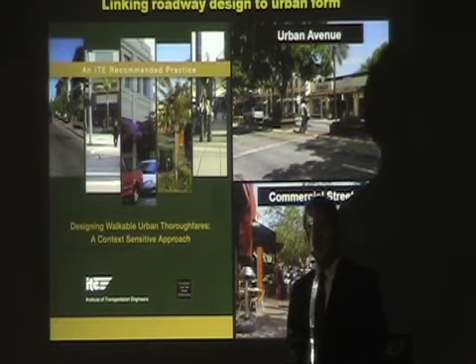Texas adopted this manual as design policy before ITE adopted it as a design policy. You've now got this in the state of Texas as a working document that you can refer to. I'm not sure at this point how it's trickled down the organizational layers in the Texas Department of Transportation, but when you hit a TxDOT project, refer to it. It's been authorized by the Texas Transportation Commission.

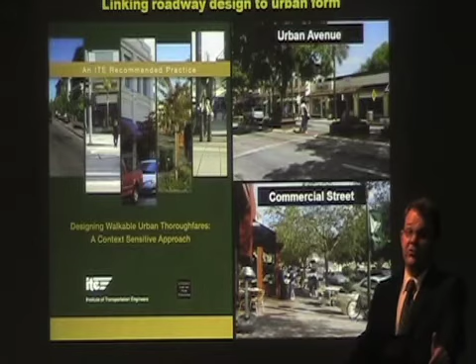It's an adopted design manual in the state of Texas, which gives you design specifications for creating urban avenues and commercial streets, something we didn't have before. There's been a training component that we've proposed as part of this, and I haven't heard where that's going in a while. But ideally, there will be training to train TxDOT staff at the district level on how to actually implement these design guidelines in practice. Texas is way ahead of the rest of the country on this, and it's an exciting time to be here.

So what I would conclude with is that there are two possible futures. The first is that we can continue with our current practices, and what we're going to wind up having is crumbling infrastructure. We're deferring maintenance, we're deferring improvements that we need to do on our system to add capacity. We can't afford to do it anymore. Sooner or later, every state's going to have to come to terms with the fact that we don't have the budget to do the stuff we've been doing for the last 50, 60 years. The money's not there anymore.

The question then becomes, well, what do we do? Do we keep trying to add new capacity at the expense of the stuff that exists, or do we start rethinking our approach? And I would argue to you that this is a better scenario than that.

According to the Brookings Institute, half of the built environment that will exist in 2030 will be new. It didn't exist in 2000. And if you think about that, in our lifetimes, we're going to have the ability to shape half of the development in this country, for good or ill. And it's an amazing challenge to deal with. We can't afford just to take care of what we've got. We've got to come up with a new way to design this.

And capacity, well, I would argue that you want to focus on providing solutions that move traffic. It's only part of the solution, and it's one that we're increasingly hard-pressed to afford. Urban design is going to be the way out of this. We've got to return to understanding how environments work and designing them to work. We need to realize that most solutions, particularly in urban areas, are going to have to be multimodal. We're going to have to reduce our reliance on automobile travel because we can't afford to rely on it anymore.